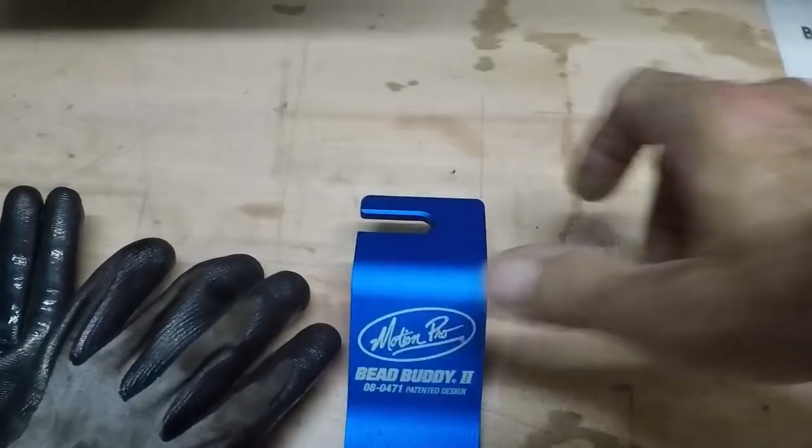Alright, well you guys saw the intro. The intro was a silent unboxing with this weird looking thing here - these fancy tire spoons.

Well, these are necessary tools. I've got a lot of tires to change on motorcycles, so I went ahead and invested in these three. This helps you get the bead on. Once you get the bead on one part, you put the rim right in there where my finger's at, wrap that around the spoke or the valve stem, and that'll hold the tire in place so you can work around the rest of the rim.

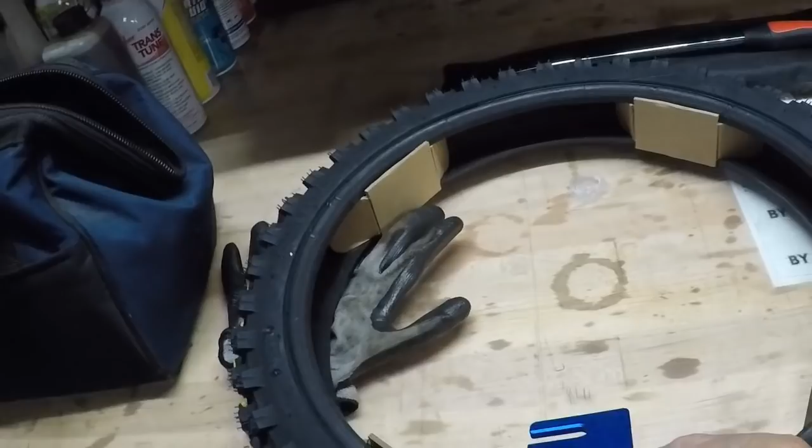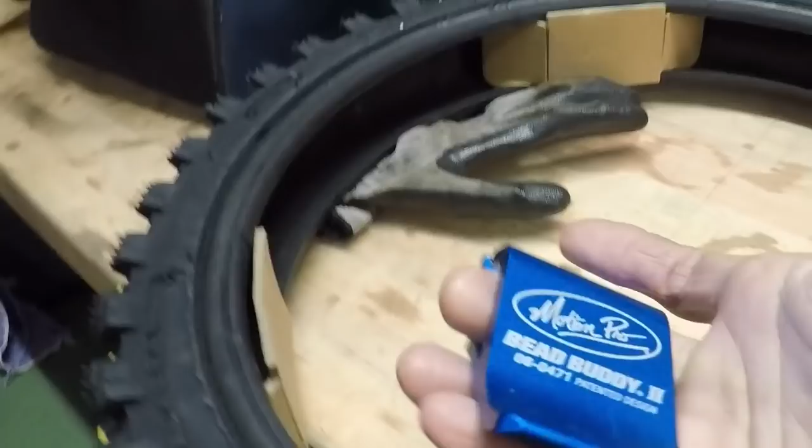Show you - sort of a generic way, but I'll show you this way. This essentially would go just like that, with the rim right here and this part of the tire down up under the rim to assist you. It's like a third hand. So that's what that stuff's for, that's what that silent intro was.

And they threw in some valve stems and a new valve stem tool, which is kind of cool, nice of them to do that. But that's for this little Kawasaki here. I now have all of the parts that I need to take care of the Kawasaki, except for one major detail.

It's low, it is on the ground. I don't want it on the ground, and I'm tired of grabbing my table. So what's the answer? How do I... got a bush hog in the way. How do I combat this?

Well, you go get a really big box. I got a motorcycle lift, and I'm going to take the motorcycle lift and go to my local steel yard, Kepler Steel, and have them fabricate sides for it. Then I'm also going to get an air-assisted hydraulic cylinder for it.

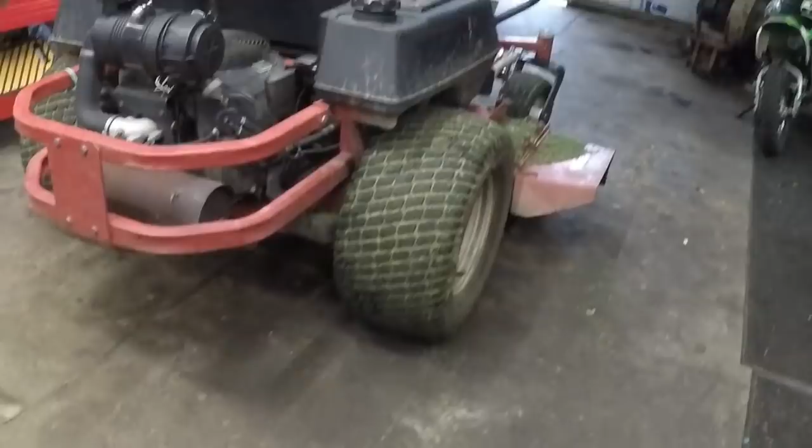All of these, they sort of kind of need to go someplace else, so I've got plenty of room on that workbench. I'm using up a whole lot of that workbench depth with those in the way. So as you can see here, I mean, I've got depth for miles.

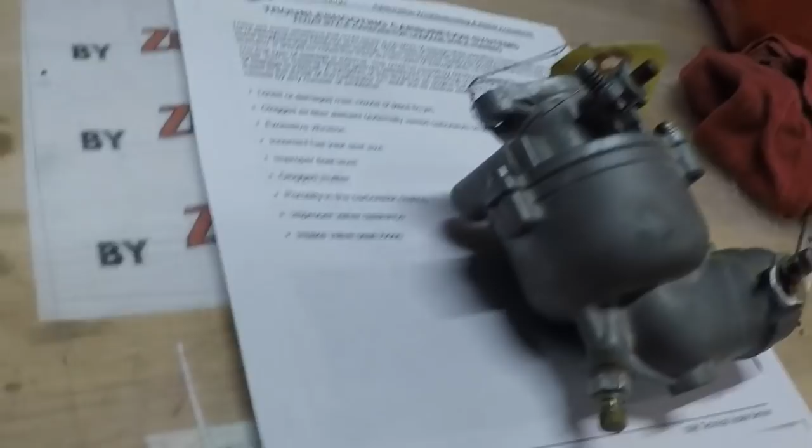What do we have here? Let's take a look. From the wall to there is 24 inches, then another roughly 10. So I've got 34 inches of counter space there. Of course, I've got the shelf, but you get the idea. So I'm going to have as much counter space here by moving those out of the way.

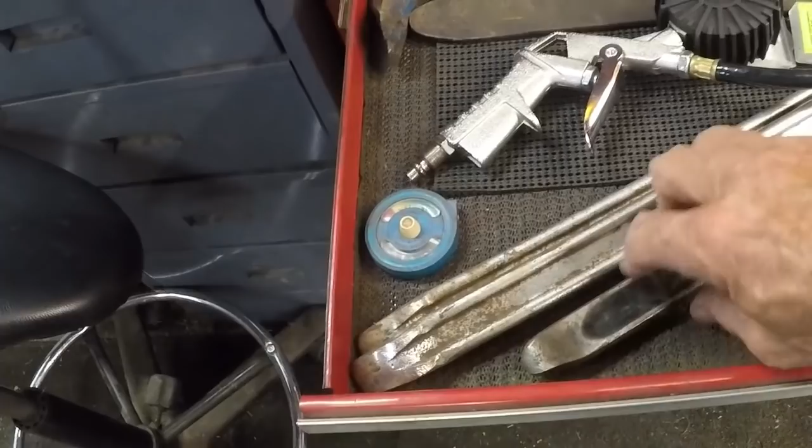And as far as the spoons go, I've got spoons like this. These are for really big tires. And I've got a couple of other long ones, but if you look at the size of the spoon on there, it's made more for automobile type rims and tires. And this one, although it would work, I only have one, so this one would work really well on the motorcycle. It's a nice short one, similar to those. Those are in fact just about the same length.

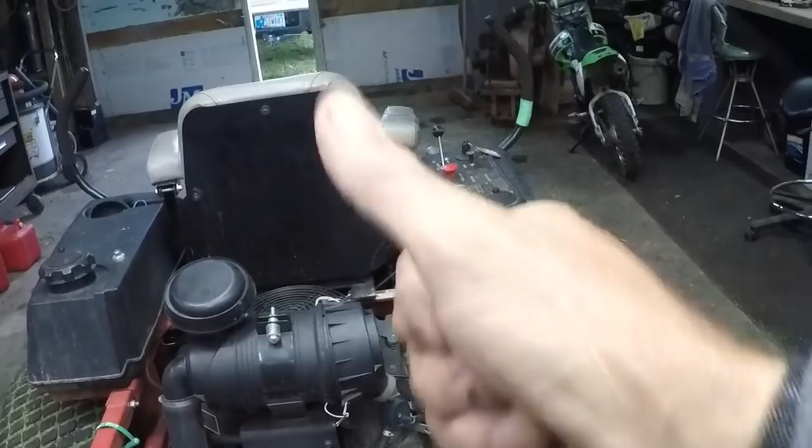So making some changes as far as that goes, and the reason I'm going to put sides on the motorcycle lift is so that I can put tractors or zero turns or whatever up on the lift and bring it up in the air. And then, like I said, it's going to be an air powered lift.

Okay, now we've covered that. You guys saw the big crate out there in Old Blue. Old Blue's running great, by the way. Now I want to touch on something else here for you guys, and that is something that was brought to my attention. It's actually a very good idea.

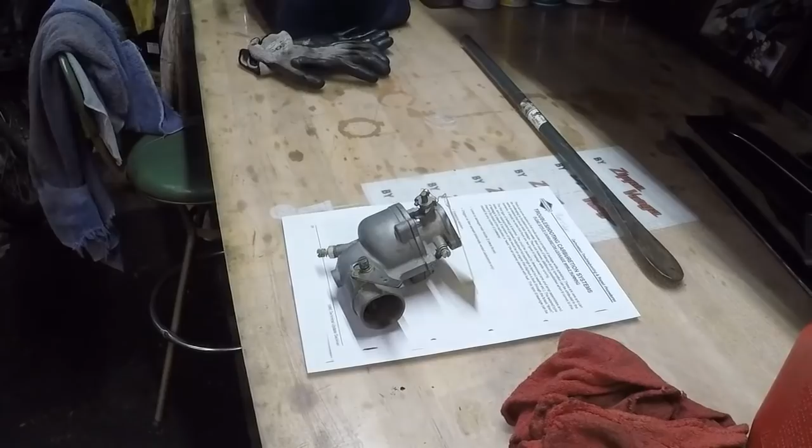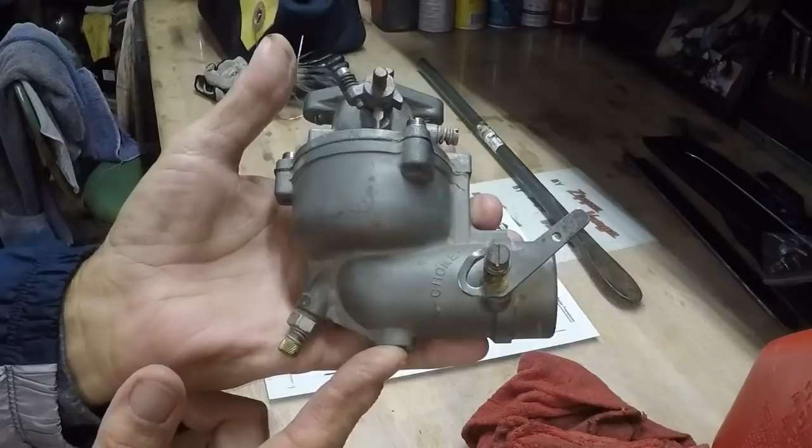You guys may or may not remember - if you don't remember and you ever had a problem with one of these carburetors leaking out of the weep hole, I did a video on how to seat the main jet to get the two dissimilar metals, the pot metal and the brass, to kind of wear themselves into one another. Alright, if you haven't seen that video, go check it out. I'll try to remember to link it right down here at the end of the video.

But there's another way to combat that, which actually came out in a news bulletin by Briggs & Stratton. This was brought to my attention by a YouTube user named Matt's Shop, written right up there at the top. And so I want to thank Matt very, very much for that. And what it does is, right here, you can see there's a roll pin right there where my pinky's at, and then this gap here.

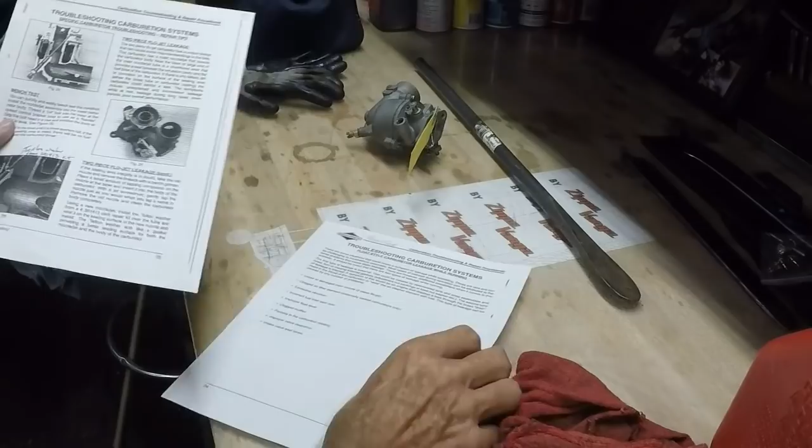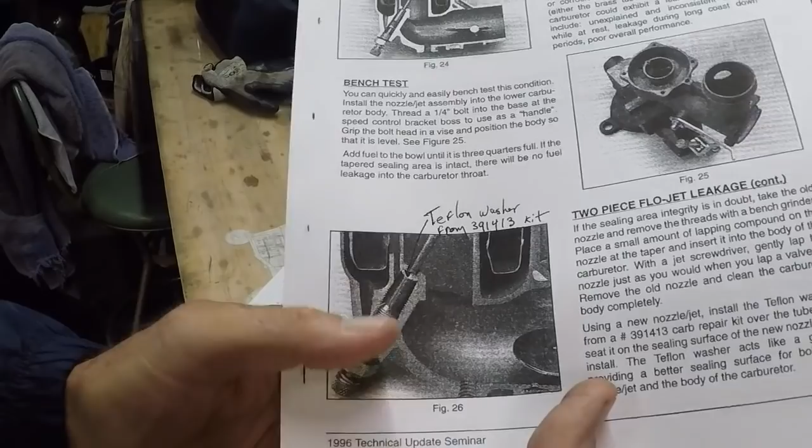Well, they make a replacement roll pin and a Teflon washer that you put in between there. Briggs & Stratton is saying to order that kit with that roll pin and the Teflon washer so that you can use that Teflon washer. This is an official Briggs bulletin here, published in 1996. You look right down here, and there's your part number - it's the 391413 kit, and it's Teflon washers. And you put that Teflon washer where the two metals come together up here. So, here's a little better picture, okay?

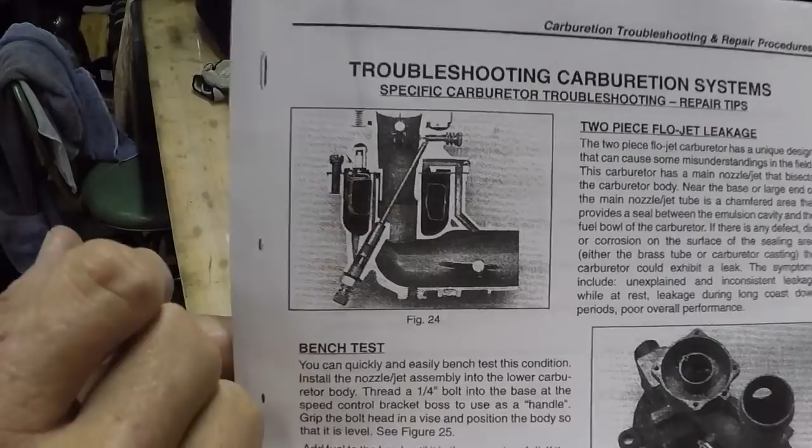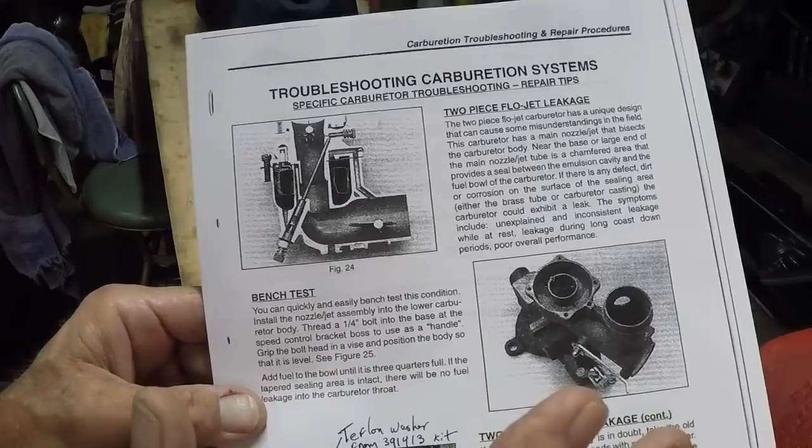Where the two metals come together, where the brass seats on the carb body, is right there. And it also goes on to say that there's a way to check to make sure it is sealing properly. They say to fill up the fuel bowl.

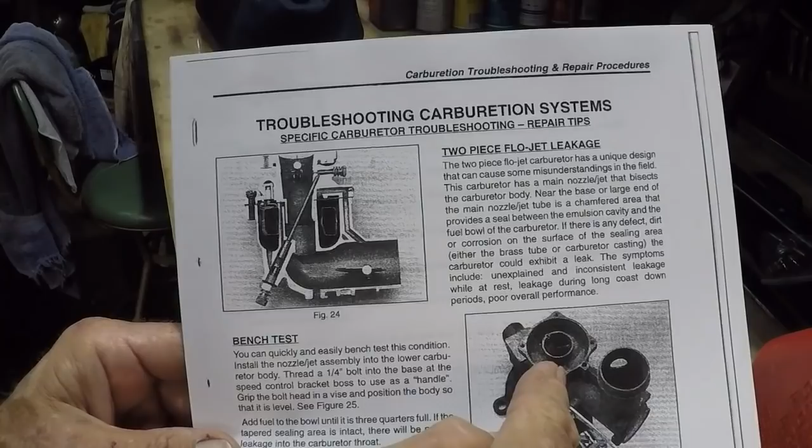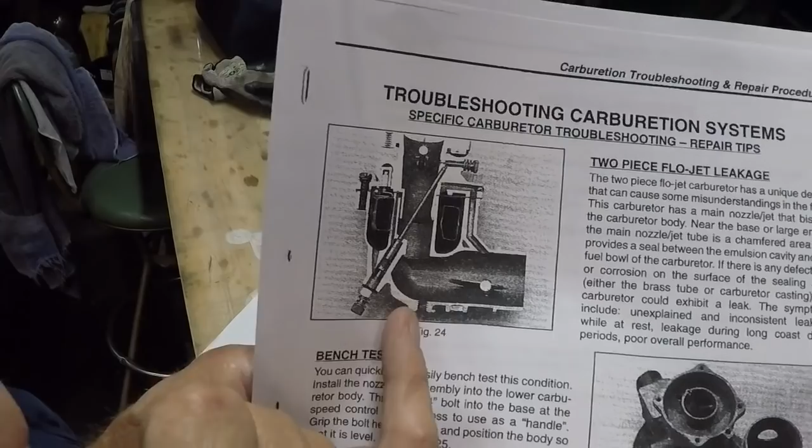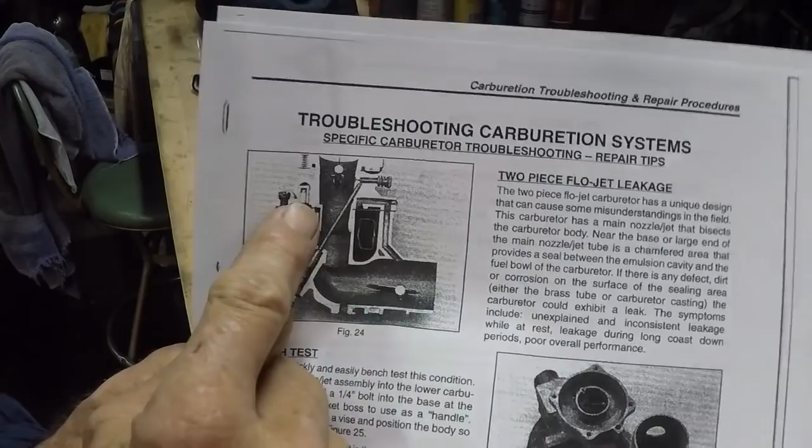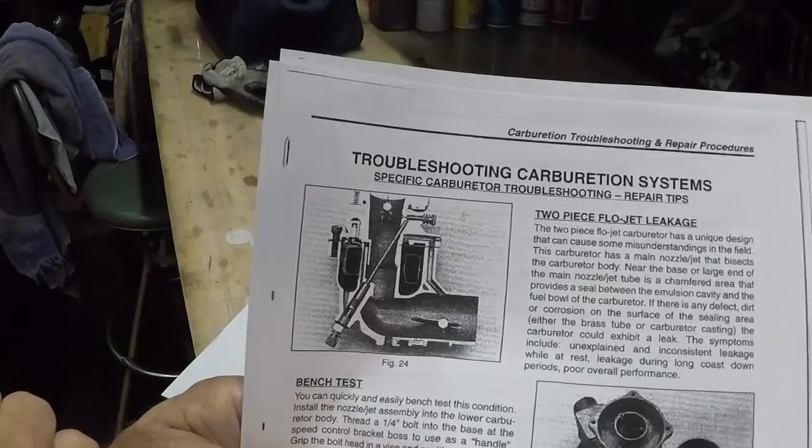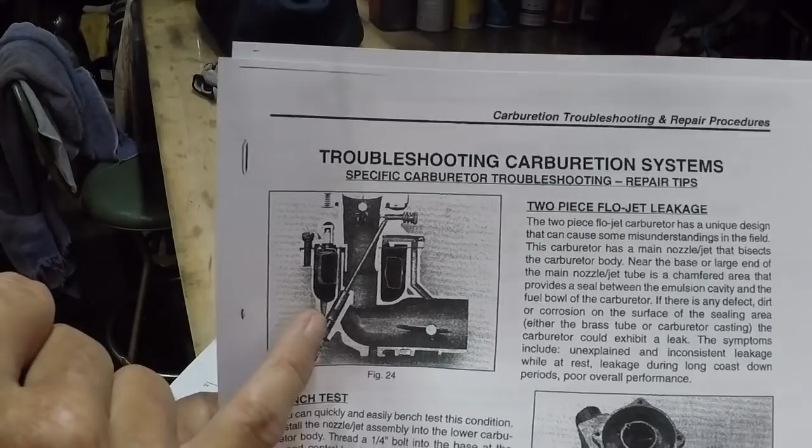Or you will see fuel leaking. From looking down the center, you'll see fuel leaking out here and running down here, and that's exactly what happens. It's nice that this has got this cutaway so I can show you that. Let me get a poker to show you.

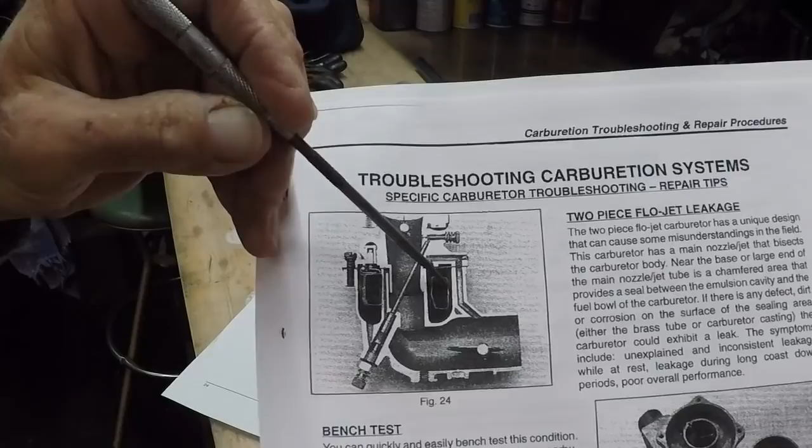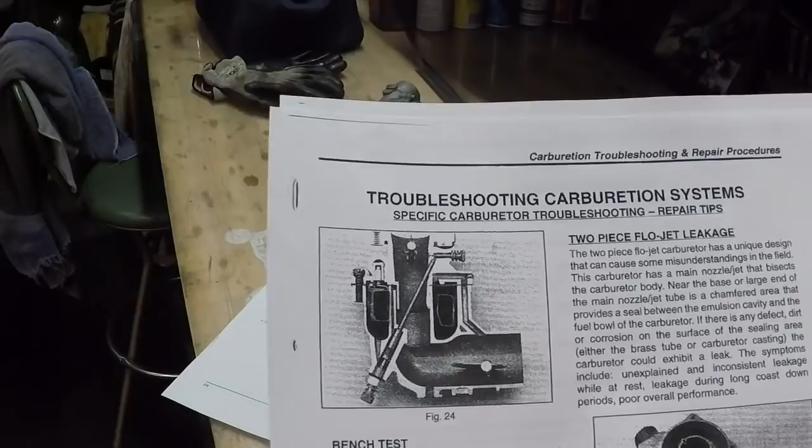Okay, right here is where the two metals come together and seal. This is the fuel bowl here and here. The fuel goes down here and climbs up and fills in right in here so that it can be pulled up and atomized into the throat. This is your intake throat here that goes up into the intake manifold and into the engine, and consequently gives you fuel for the engine to run.

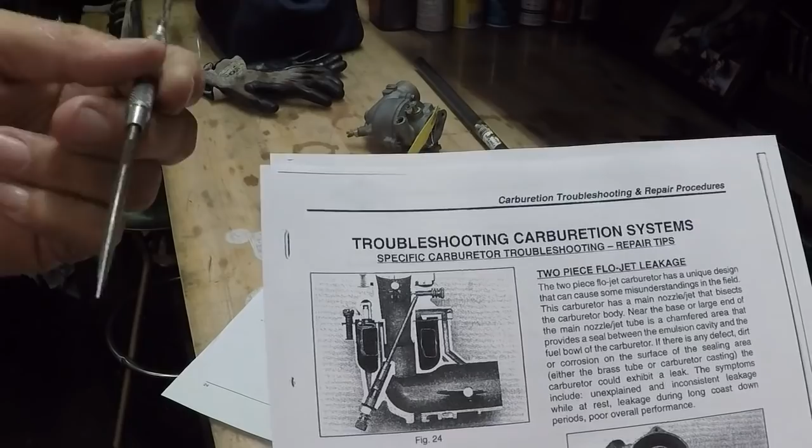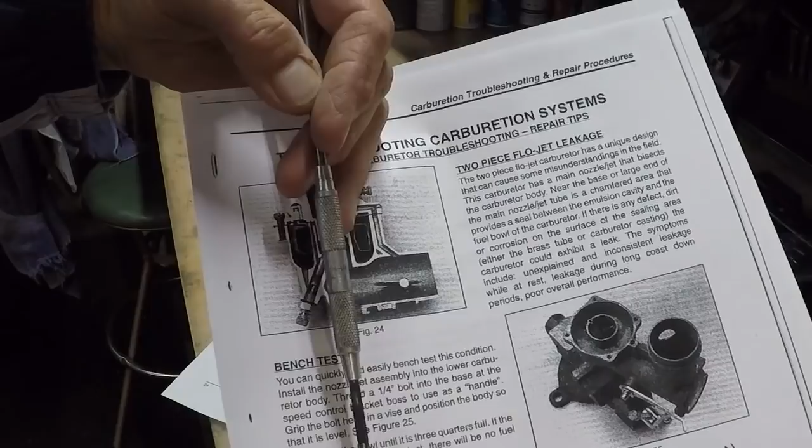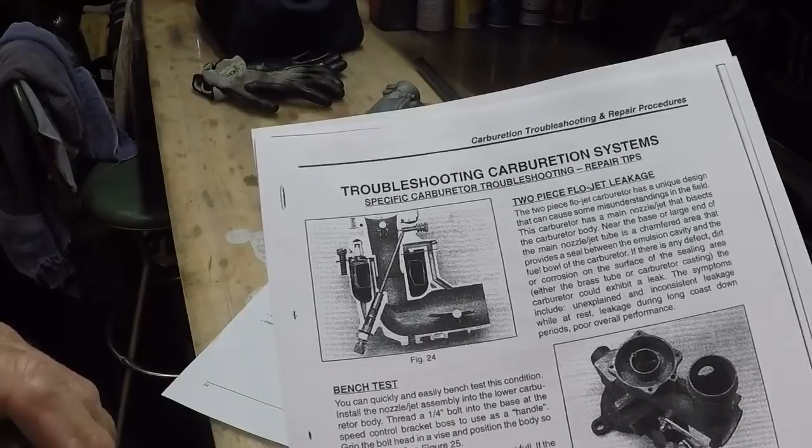So what that Teflon washer does, that little Teflon washer right there, is it's so thin, but being made of Teflon, it is good and sturdy. So you can seat your main jet down, or your emulsion tube as it's called, with that Teflon washer on there, and that'll seal these two areas and stop the leaking I described.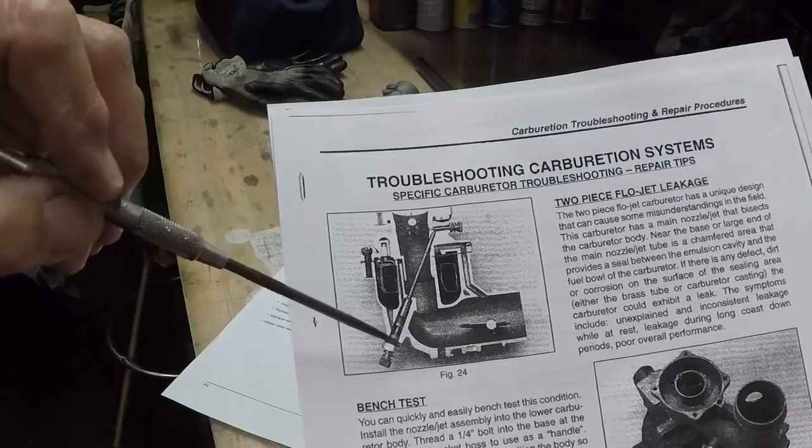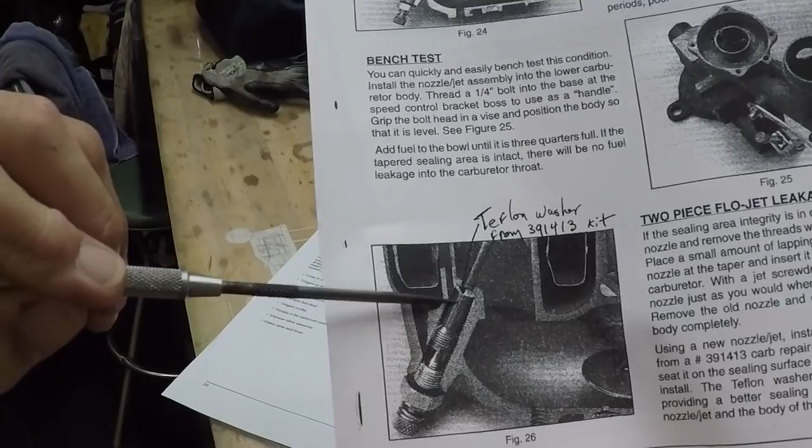I don't know if that was even in the picture, but that Teflon seal goes right there, down the small diameter of the tube, and just rests there. You put your emulsion tube in, and you're set and off and running to the races.

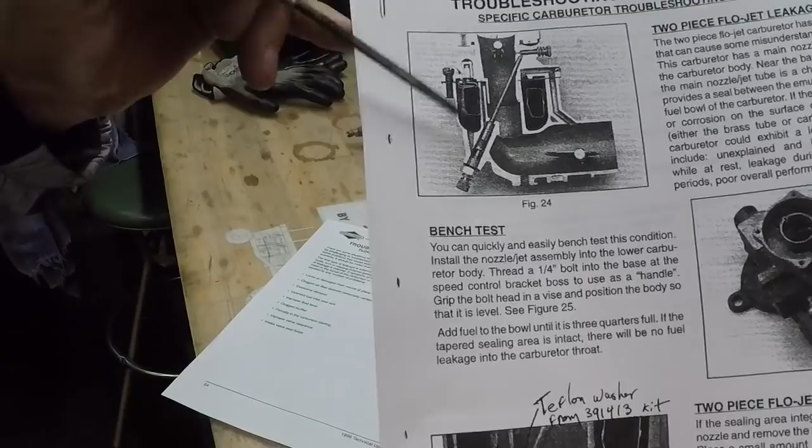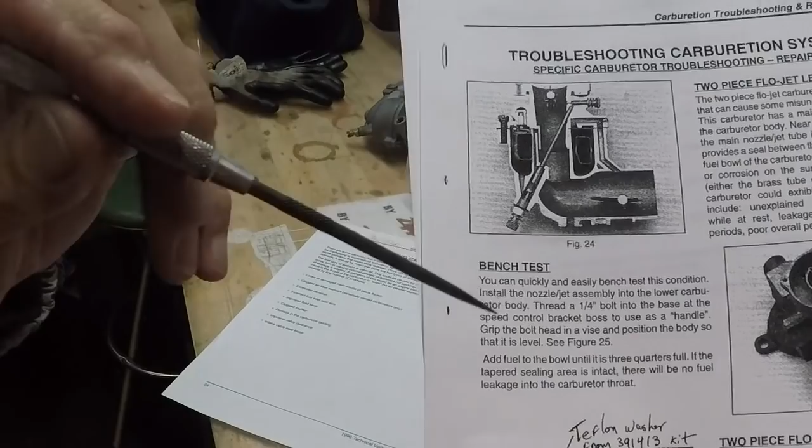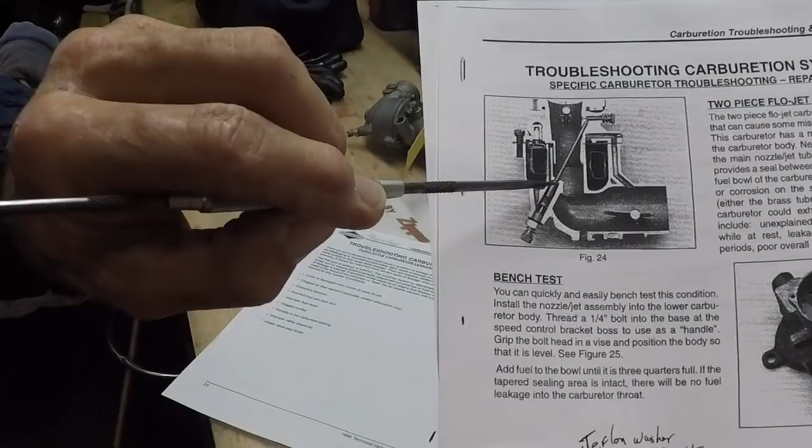Another thing this points out is you can actually take a sacrificial emulsion tube and grind all of the threads off of it so it'll just slide in and out of the carburetor body. Then use lapping compound and that dedicated sacrificial emulsion tube or main jet with a screwdriver to polish the seat where the two come together.

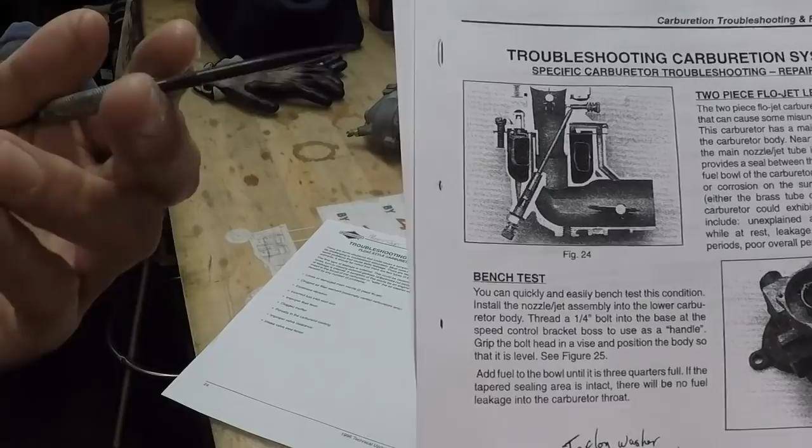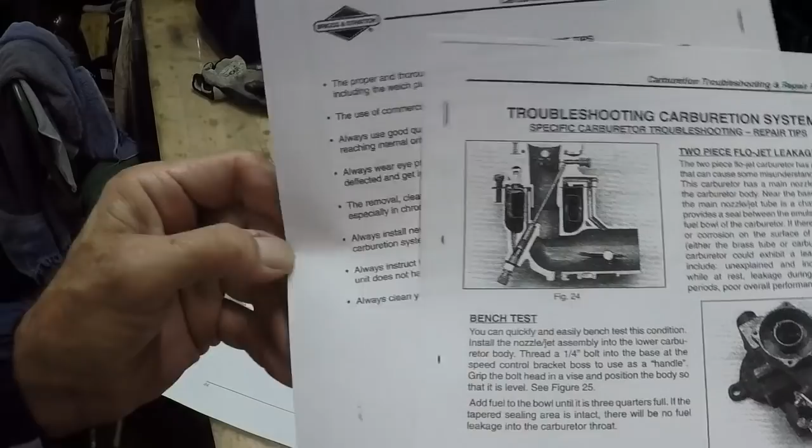Pot metal is notoriously porous, and over time it degrades. It takes many, many moons and poor conditions for it to happen, but it can happen. So I wanted to bring that to your attention. I really want to thank Matt from Matt's Shop for pointing that out to me as well.

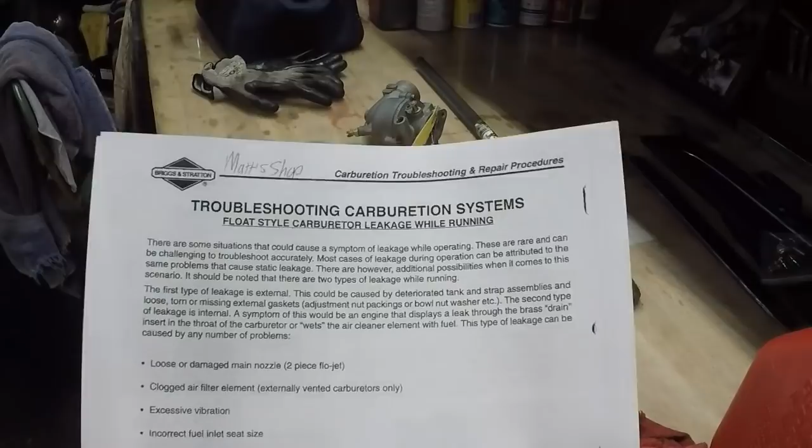But that is a lesson that is now ingrained in my brain. I've got that, and it makes perfect sense, because that is exactly where these carburetors leak, and I've explained that before. I just wasn't aware there was a bulletin out about it.

So there we go. We talked about what we're going to do with the little KLX 110. It's going to be going up on the lift Monday morning. It is now Friday afternoon. What time is it? It's 10 to, or quarter till 3. Miss Zippo will be here soon, so today is pretty much a wash. It's been raining like crazy. I left my headlights on, old blue. I need to go shut those off.

Decided I'd go ahead and take a partner with me to help with this, but I picked the wrong partner. I've been known to pick the wrong partners to help me before. Sure enough, Clyde did absolutely nothing but sit there and kick back and do literally nothing.

We also picked up a couple other things from Harbor Freight while we were there. And I also stopped and got some information on getting t-shirts made.

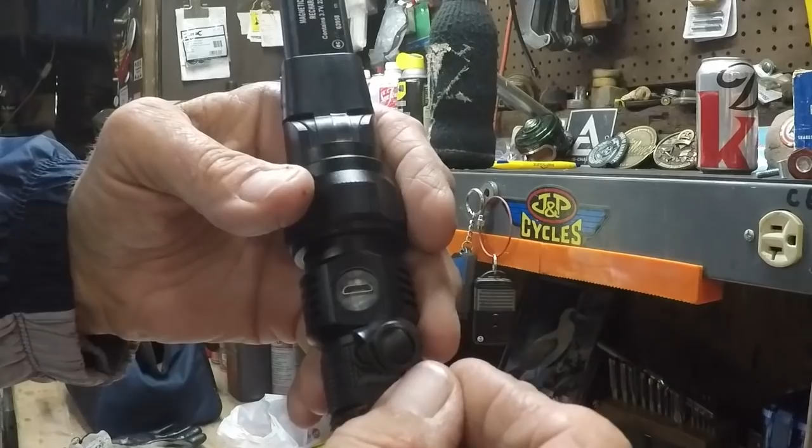And I got a sneak peek of something that I don't think we were supposed to know about. It comes with its own charging cord, and it just plugs in right there. Plug the USB in, it lets you know when it's fully charged. Plugs into any regular 12-volt outlet with an adapter or into home power.

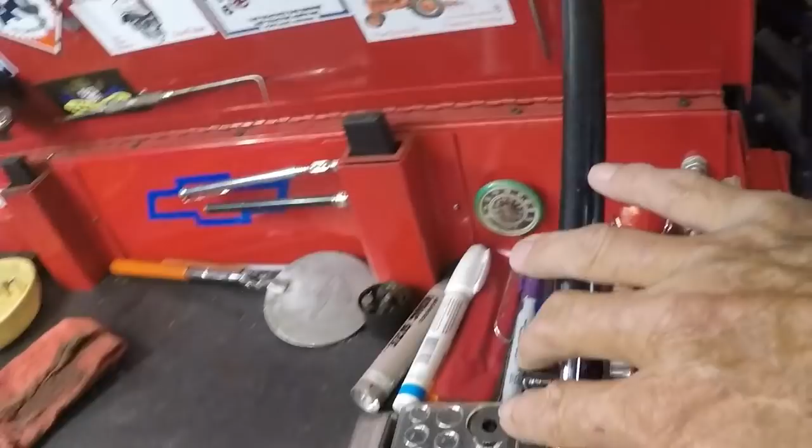Okay, Big Red. Big Red is the first generation, and because it's the first generation, it does not have the struts that allow it to go all the way up to 90 degrees. All the new ones come up to 90 degrees.

Also, I've changed all my lining over to this nicer, heavier lining rather than that crappy foam stuff. The new ones already have that liner in all the drawers. You can see that I've changed it here. What happens to it when you don't change it is you wind up like this - see how this bunches up, it's just all bunched up in there, a mess. This stuff is really, really thin. Look, it just popped a piece off. It's just really, really thin, medium density foam.

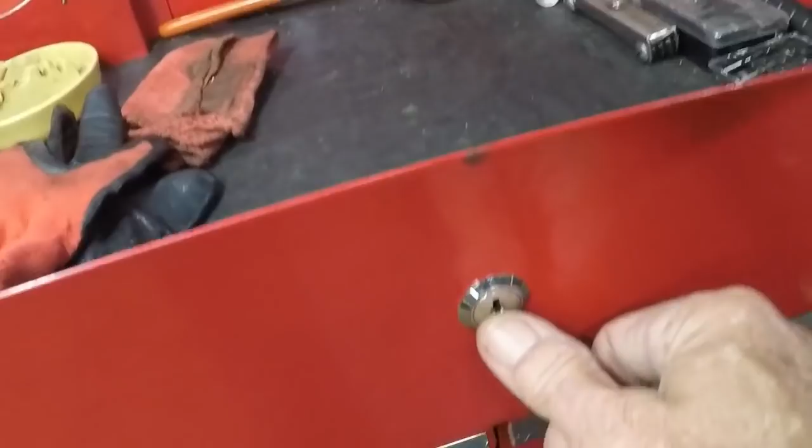So yeah, that's why I changed it out. Well, they're putting that in these now. They're also more robust with a 9-pin round lock, similar to what's over here on the Master Force. Locks just like that, the barrel locks.

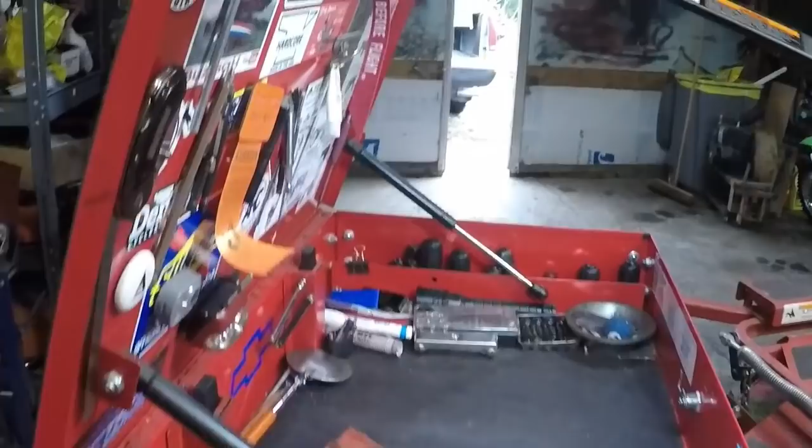But what I got a glimpse of, which I don't think I was supposed to have gotten a glimpse of, I got it in an email from the Inside Track Club, and then it disappeared on me within an hour. They obviously had announced too soon.

They're coming out with 3 more colors. Right now they have red, black, and blue. They are coming out with 3 more colors - lime green, yellow, and orange. I saw them, and then Miss Zippo and I searched and searched and searched, trying to find them again, and found absolutely nothing on them. So I was given a sneak peek, and then that sneak peek was taken away from me.

So it's not gospel that it's absolutely going to happen, but the Series 2 US General Pro toolboxes may be coming out with a total of 6 colors, giving us the neon green, the yellow, and the orange options. If that does happen, I may end up getting an orange one, because you know Zippo likes his orange stuff.

Alright, I have been going on for 18 minutes now, plus the unboxing on those spoons, so it's going to be a long-winded one. I don't even know how to title it, so I'm just going to title it a mixed mash of all kinds of new yummy goodness and carburetor information, or something to that effect.